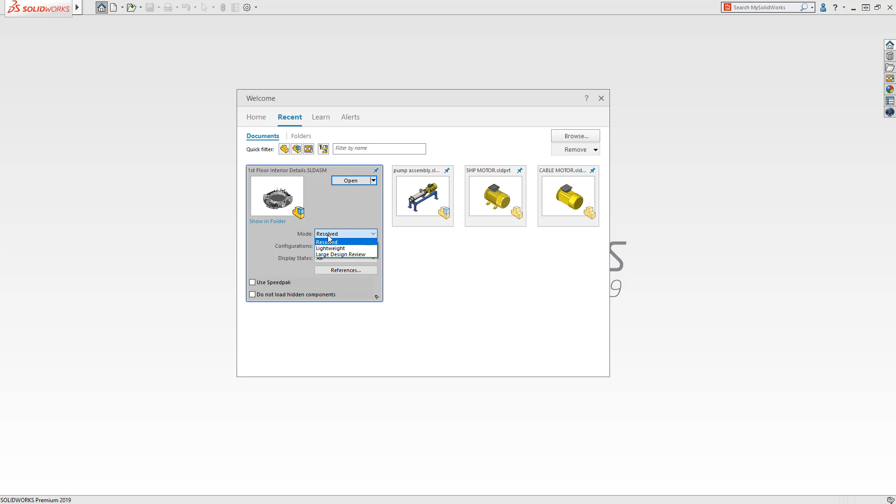Large Design Review, a capability that has been available in SOLIDWORKS for many years, allows users to open very large assemblies lightning fast, giving them the ability to quickly interrogate a model or conduct design reviews. In Large Design Review, users have access to the Feature Manager, and it provides super fast view manipulation to rapidly visualize and move around your assembly.

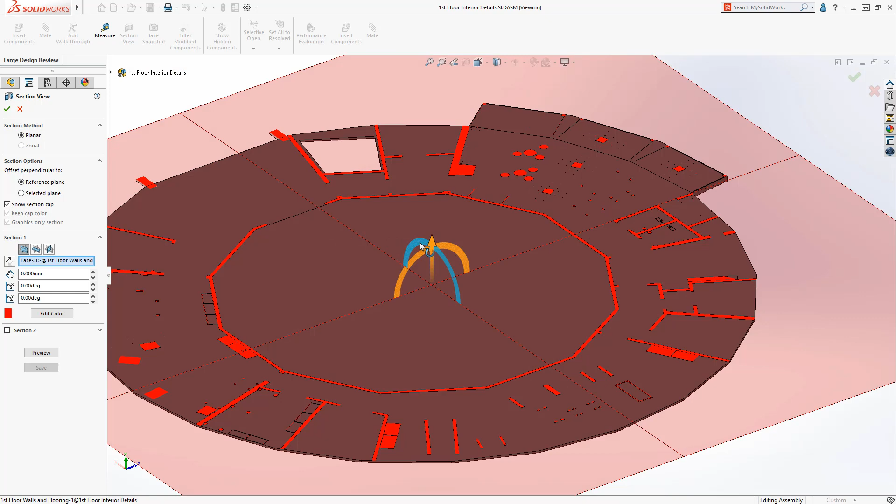The ability to measure distances, cut cross-sections, hide and show components, and do walkthroughs are also valuable tools to interrogate a large assembly. In SOLIDWORKS 2019, Large Design Review has been enhanced to include assembly editing capabilities.

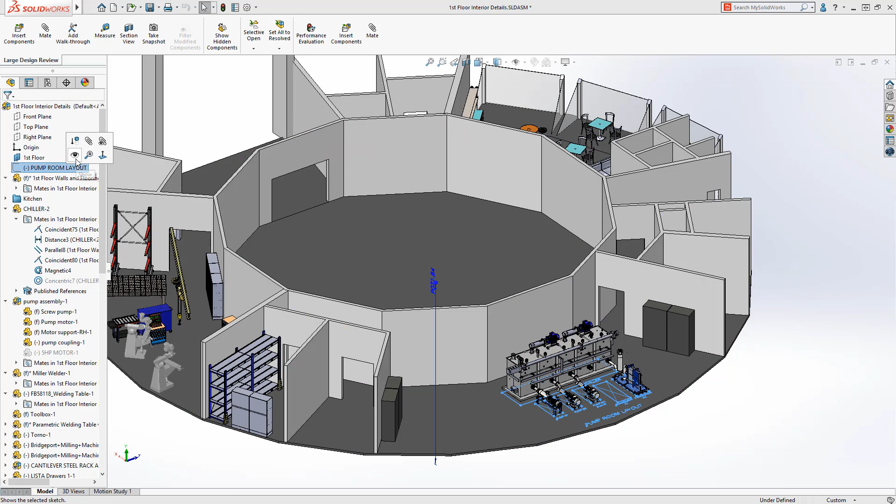Reference geometry like planes and axes are accessible, as well as mates where changes can be made to show how a component is assembled. Sketches can be shown or hidden and can be referenced for adding mates or for visual clarity. If you're looking to delete a few components that may not be needed, this can now be done in the new Edit mode.

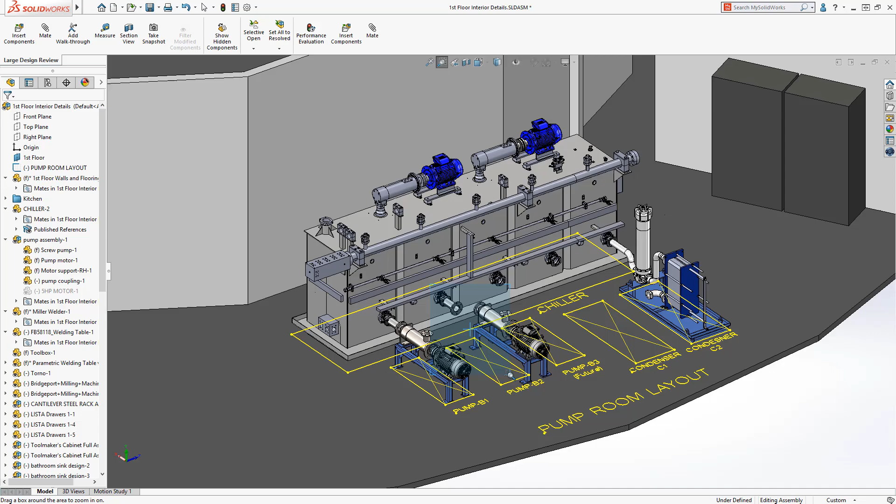New components can now be added to your design just as you would in a fully resolved assembly, and these new items can be placed and mated into their proper positions.

Mating is done just like you would in lightweight or resolved mode, including the use of the Quick Mate toolbar. Components that have been prepared to use magnetic mates can be assembled as well and snapped into position, saving a great deal of time when doing large facility layouts.

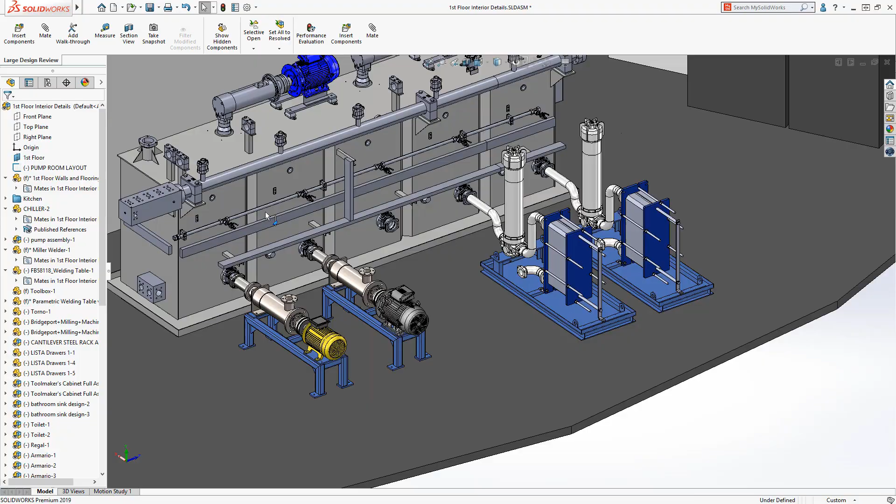Changing configurations is another commonly used workflow, and this capability is now available with the Large Design Review mode. If components were hidden along the way, you can use the familiar Show Hidden Components tool to restore their visibility.

And when you're finished making your changes, the assembly can be saved, so that the next time it's opened in resolved or lightweight mode, you can be assured that all of your work has been retained.

With these enhanced capabilities in SOLIDWORKS 2019, users will be able to take advantage of the excellent performance of Large Design Review to rapidly make changes to their assemblies.